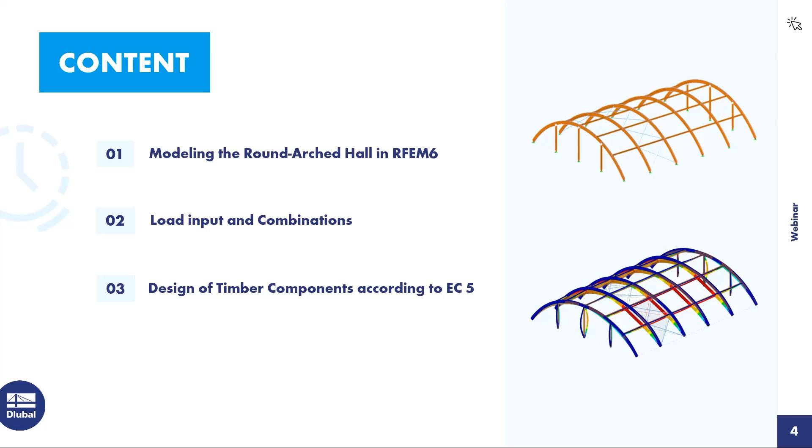To proceed with our project, I would like to go to our program RFEM 6. Here I need to create a new model, which I will name Round-Arched Hall. The add-ons that we will need today are the timber design and also the structure stability. We also need to pick our standards. We will need the European standards for timber, also with the German National Annex. We can continue by clicking OK.

There is a possibility that from the latest projects that you've done in RFEM 6, you would have here the materials or also the sections that you used before. To delete them, you can just go to the basic objects and say delete all basic objects. In this way, everything is deleted and we can continue with the model of our hall.

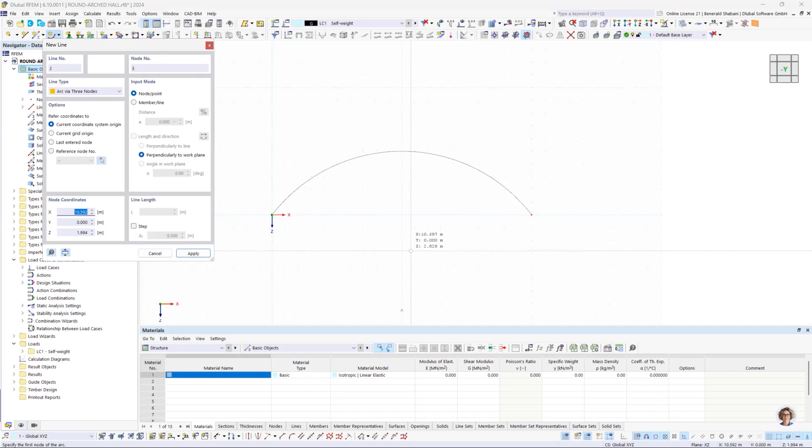First, I will need to draw an arc. To do that, I will pick an arc via 3 nodes. Our hall needs to have a height of 5 meters and also a 20 meter span. We have modeled our arc. Now we need to have a member from it.

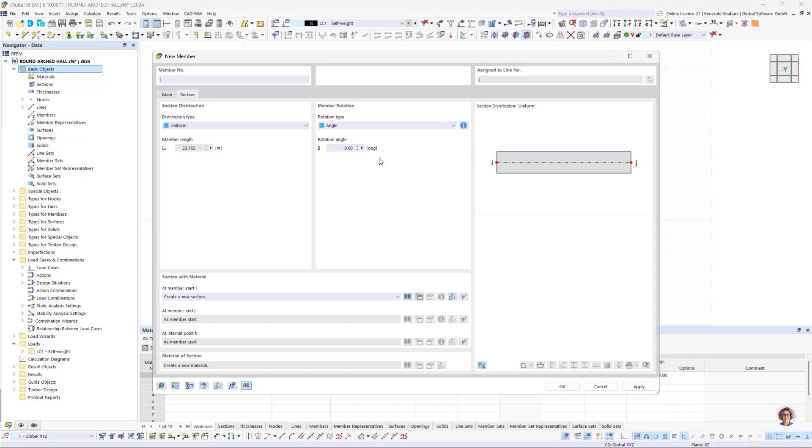Of course, we need to select a new section and also a new material. We will search in our library for the region European Union and a material type of timber. For our round arch hall, we would need a glued laminated timber, GL28c. As a section type, we will choose Massive 1 so we are able to just write our geometry. In this case, we need the geometry of 200 millimeters times 480 millimeters. Say apply and OK.

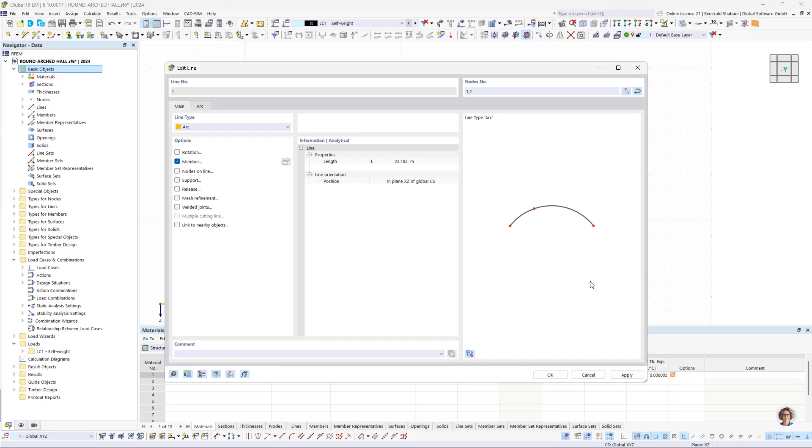And we can see that we have our truss. Of course, our truss also needs the hinged nodal supports. We just need to select the nodes and we will have our nodal supports modeled. We can also see that they are a bit too small, so for the model to look better and for us to see it in a better way, we can just make them a bit bigger. That would look a bit better, and we would have a better view in the program.

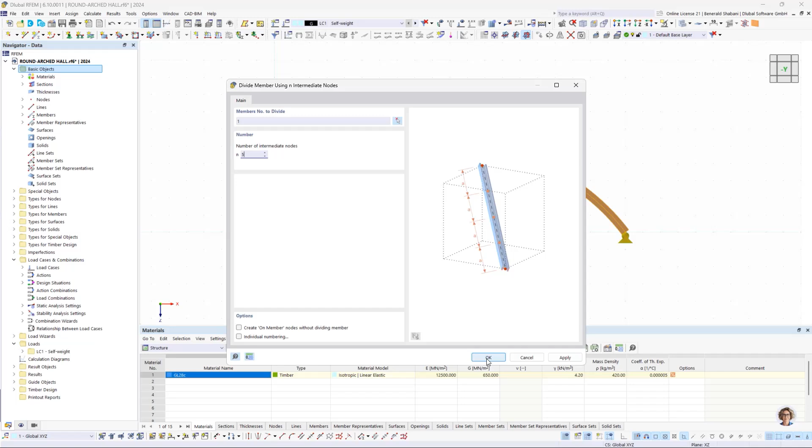Next, we want to divide our truss with intermediate nodes. We will divide it in 5 intermediate nodes. We need the nodes for the coupling. They are very important because the coupling rods should be located at these points where the nodes are, and then we can copy the truss. When we copy the truss, we will also create the coupling rods. But we'll proceed here first with OK. We'll see that our member is divided by 5 intermediate nodes.

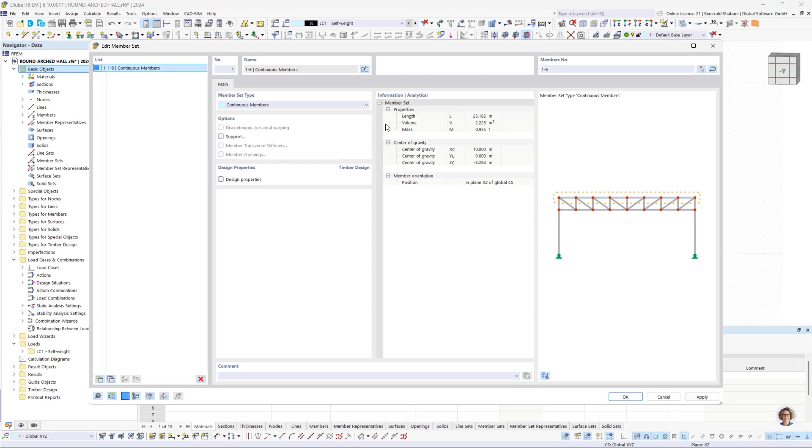Before we copy it, we first need to create a member set. Here we don't need to do anything, we just press OK, and we can see that we already created a new member set. Now we are ready to copy our member. To do that, we need to check create copy. And for our round arch hall, we will need 5 copies. But as we said, where the nodes are, we will also need to have the couplings.

Instead of modeling each one of them, we can just proceed here at the menu numbering and options and check here step links. And then we say here link nodes with line and also nodes with the member. Of course, here we need to also find another type of section.

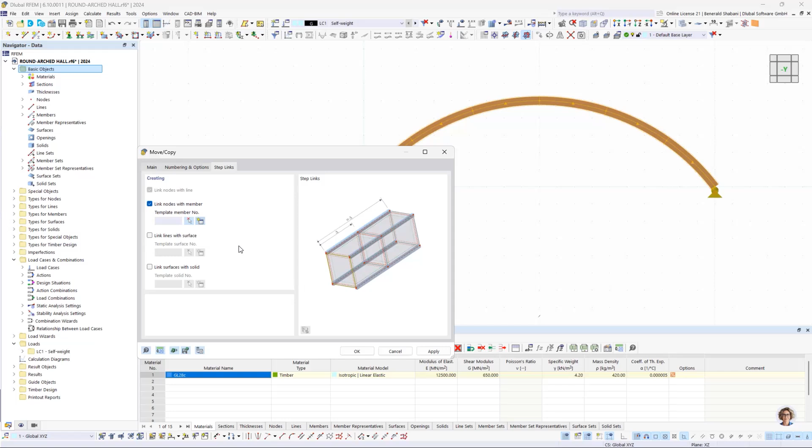We go to the sections, but firstly we need to choose our member type as truss. We can add a new section here and say for the truss I need a geometry of 120 millimeters times 120 millimeters. We'll press OK. The material is also the same, so we don't need to change it. We just can proceed with OK.

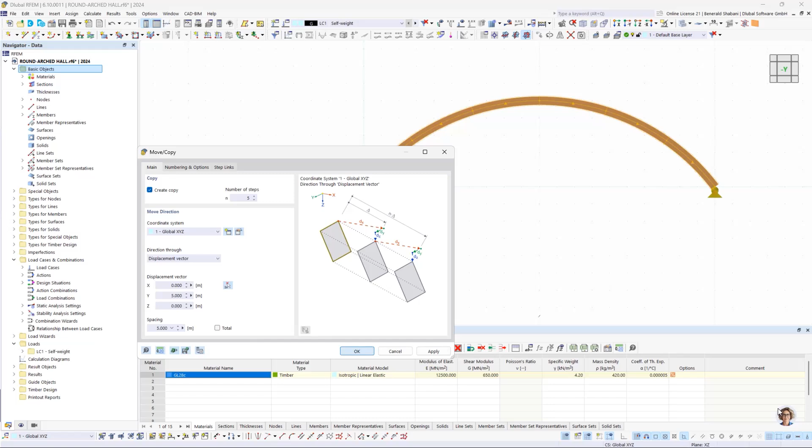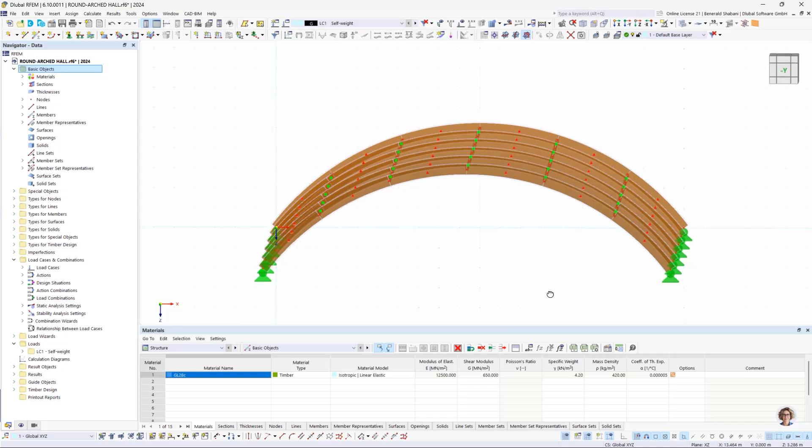And we say that I want to have my copies in Y direction every 5 meters. We'll press OK, and then we will see that our round arched hall would be modeled. Of course, the trusses here at the bottom, we don't need them, but I think it's faster this way for us just to delete them, so we can just delete them. Of course, we could have also before deselected the nodes here, but yeah, that would be just unneeded work.

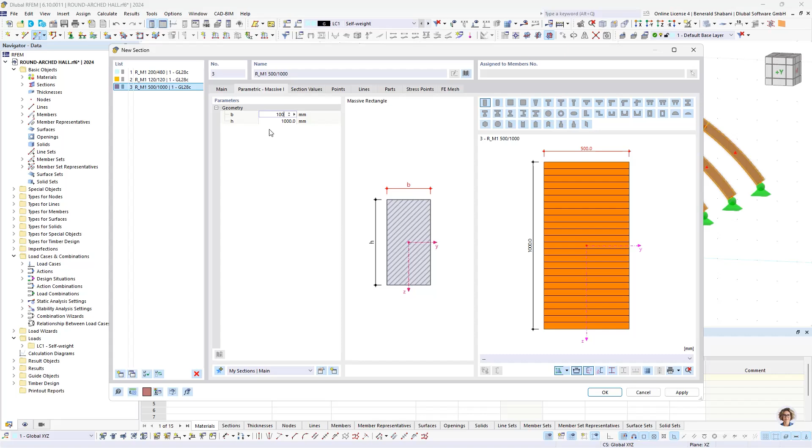We can see that our hall is partially modeled. The next thing to do is to model here the beams that will serve as gable support. To do that, I will need to find another section, but this time not anymore as a truss, but as a normal beam. Of course, for our gable supports, we will need to choose a new section, which will have the geometry of 100 millimeters times 200 millimeters. We can press here OK to proceed. The material of the gable supports can still be the same, so we don't need to change anything here.

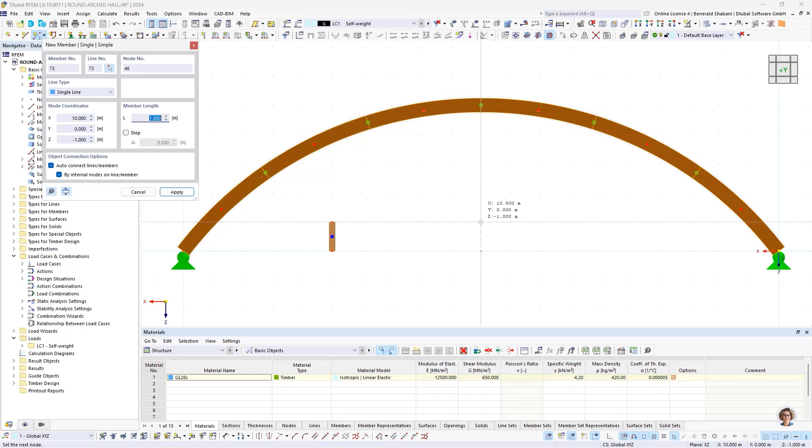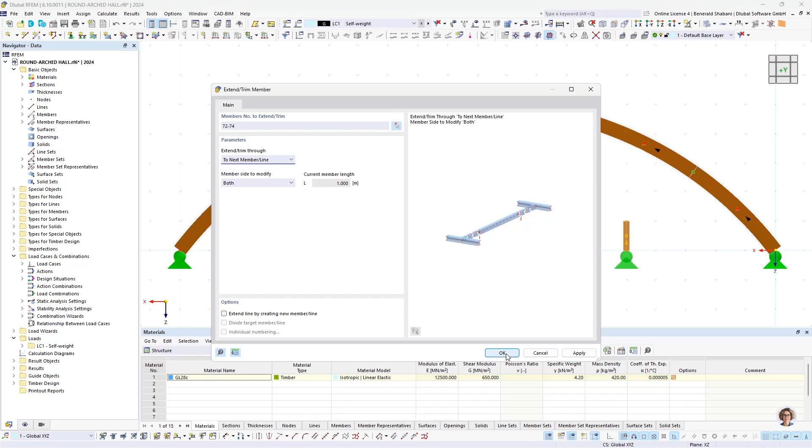I will first start to model them as shorter beams, and then later I will extend them until the next member. Of course, they also need their personal hinged nodal support. We can select the nodes and proceed with OK. To extend the gable supports until the next member, we need to select all three of them. We can find here extend or trim member until through the next member or line. We can just proceed here with OK, and we can see that our gable supports are extended to the next member.

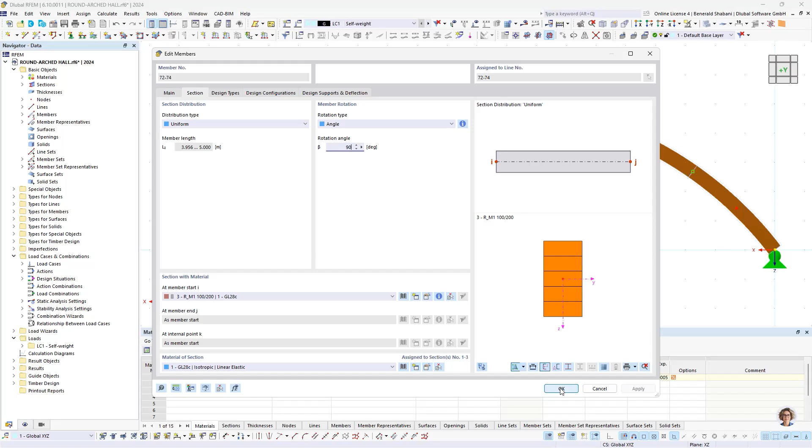We also need to turn the gable supports. We need to rotate them in a 90 degrees angle. That way the major axis will be in the longitudinal direction. To do that, we need to edit all three of them. We will go to the sections menu, and here we can see a part that says member rotation. Here we can just type rotation angle of 90 degrees and then press OK. We can see that our gable supports are rotated in a 90 degrees angle.

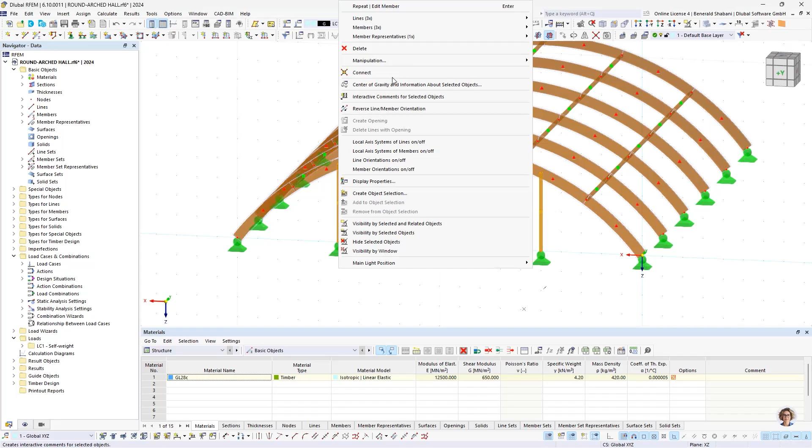Of course, we need the gable supports also for the other part, so we just can copy them. We will select everything that we need to copy and go to the menu, Move or Copy. We'll select here the menu of Create Copy, and we will need just one copy. Here, you need to also be careful because for the trusses, we also needed the couplings, and probably there is a possibility that this option is still on, so we just need to turn it off. In our case, it isn't like that.

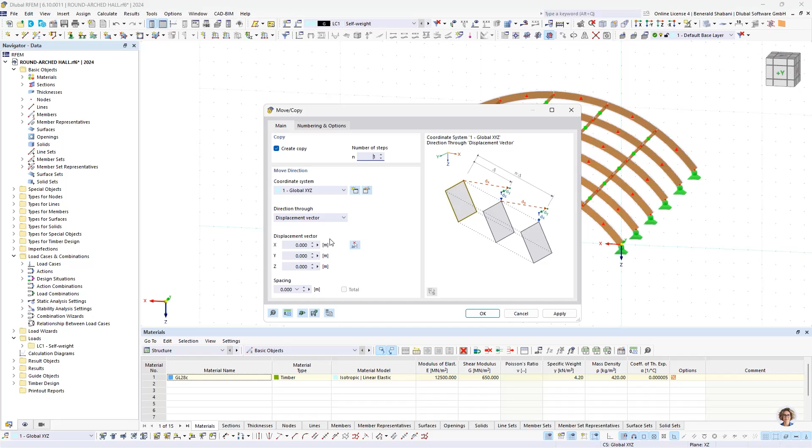We can choose our displacement vector just by choosing 2 points on our model. The first point that I will choose would be the point here, the original, and the next point where I want the things to be copied. We'll say here OK, and then we can see that the gable supports are also modeled for the other side.

The next thing I want to do is I want the connecting rods to align along the top edge of the truss so that each rod has a different angle. To do that, I need to align them toward the center of this arc, of this truss. How does this work? We can find it now. In our example, we can see the middle point of this arc.

But if in your model you cannot see it, you can just go to the display navigator and search here for lines. And here you would see a menu that says center point. You can just turn this on, and then you will see these small signs. Here, I just need to put a node as a helping node.

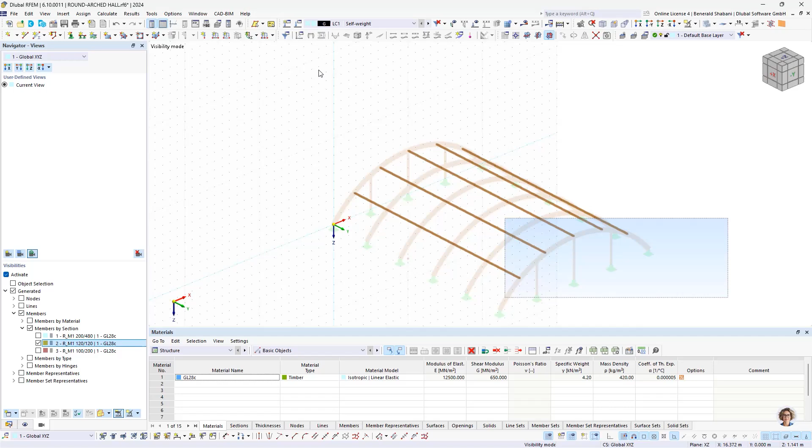And then I also need to select all the rods. You can do it in a lot of ways, just by selecting here or going to the views by visibilities. We can activate them, and then we can search for members by section. We know that our rods have a section of 120 millimeters times 120 millimeters. So we can just see them. We can select everything and then deactivate the visibilities.

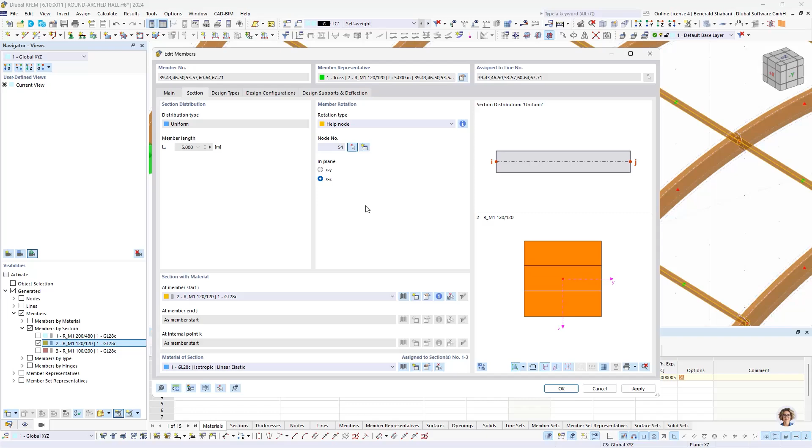Now we can edit all of them. And at the menu member rotation, as a rotation type, I don't need an angle anymore, but I need a help node. I think we know which node we are going to select. And in the plane X until Z. We'll say here OK. And then we will see that our rods now have a different angle from one another. They are the same way as I wanted them to have.

Now, the thing that I need to do is the bracing. For that, I will create another section. As a member type, I will use tensions. Here, I also need to find another section and also another material. Firstly, I will choose the next material. I will need a material for steel. Here we go firstly to the library, and as material type, I will search for steel. I can also type here S235.

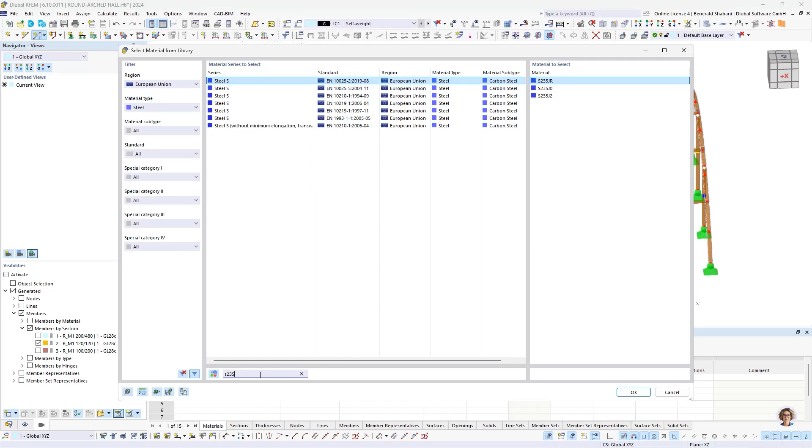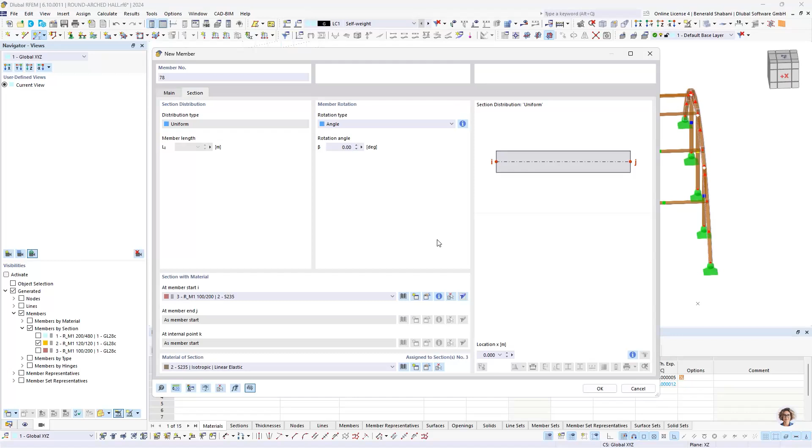I can press here OK, and now I need to look for a new section. For our bracing, I would need a round. As a section type, I would need a massive one, so I can give the diameter by myself, and I will also need a round section. We'll need a diameter of 16 millimeters. We can proceed here with OK. And then we can start to model it.

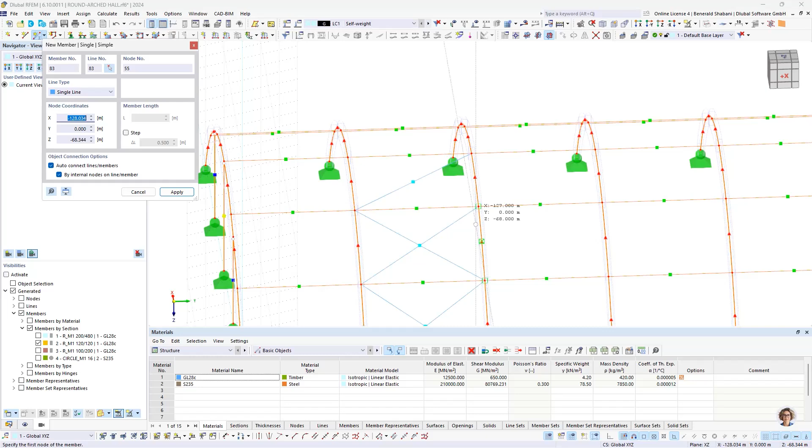For it to be easier for us, I can put our model into a wireframe model, so I can see every node and every line that I need to select. Modeling the bracing can be done like this, or you can draw just one of them and then mirror the other side, or with a rotation. There are a lot of ways to draw them. In our example, I will draw them until here, and then I want to mirror them for the other side.

To select all of them, I just click at the blue member representatives, and then I will go to the menu mirror. I will also need a copy from it and select the plane Y, Z. I will also need to pick a point here, which would be the node here, and just press OK. We can see that our round arch hall is fully modeled.

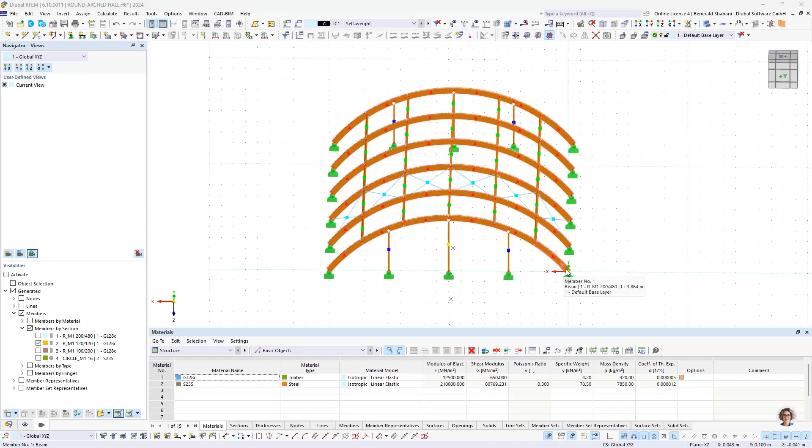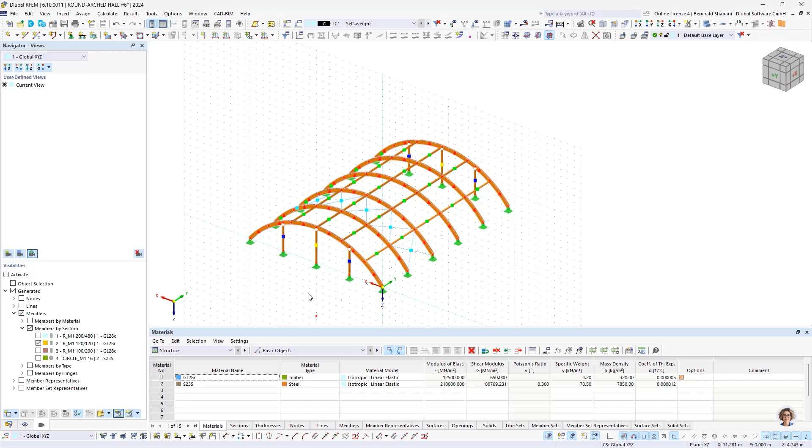Now we come to the second part of our webinar, which is also the last input. To proceed with that, I will firstly need to model at the gable supports two load transfer areas, which will help with the load transfer. They are probably the biggest advantage that we have today in RFEM 6 and that we also use in our model. Because of the roof construction, there are triangular and trapezoidal loads that apply to the gable supports. Without the load transfer area, we would have to apply the triangular and other types of loads individually. That would be a waste of time, and it would also be a lot harder than just using the load transfer.

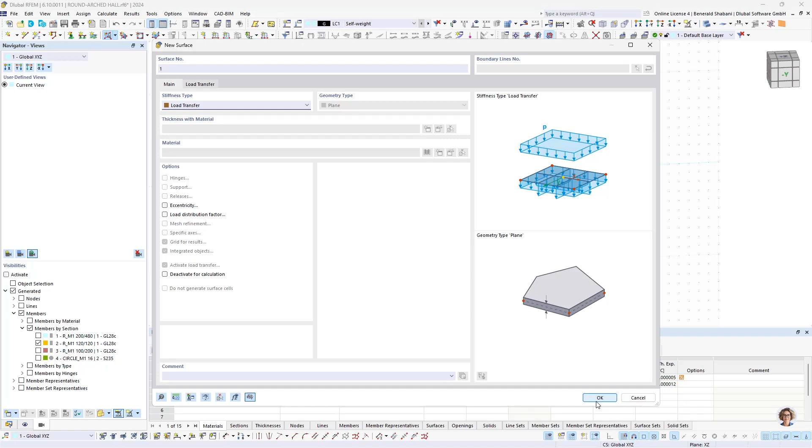First of all, I will need to draw here a line which would serve as the borders of the load transfer area. Second, I can just go to the menu here and select boundary. As a stiffness type, I will need a load transfer, and as you can see, I cannot specify a thickness or a material because it's a surface that is not there in reality. It's just there in our program to help us with the load transfer. We will continue with OK, and then we will select our boundaries.

We can see that we modeled our first load transfer area, and now we proceed with the second one. Now we also have the second one. Our hall spans in the x-axis. That's why we also need to go to the load transfer and select the category load transfer direction just in X stripes. That means that the surface is cut along the local axis into many surface stripes. The local axis you can see if you just put the mouse near the load transfer. The same thing we also need to do for the next load transfer area, and then we can proceed with OK.

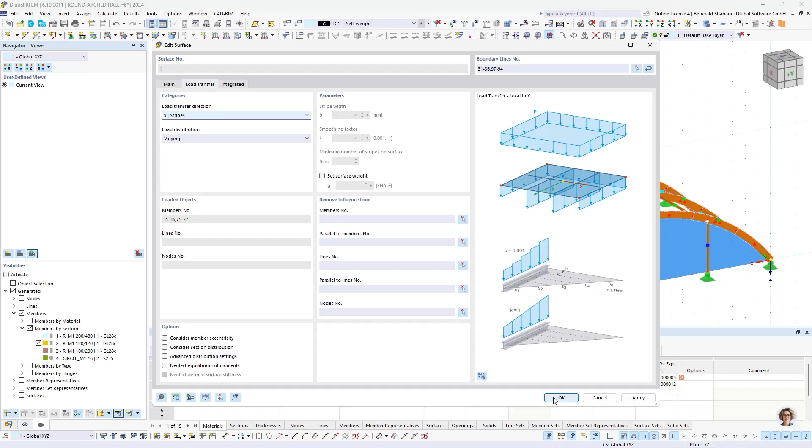As the first load, I will need here dead load and also the roof structure.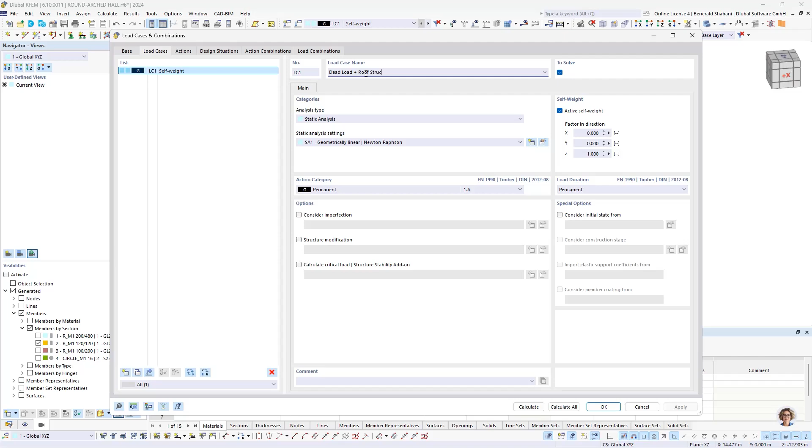I figured that here from truss to truss there would be trapezoidal profiles like sandwiches with insulation on top and a foil roof. I assumed it will weigh like 30 kilograms. Of course, the dead load can vary from hall to hall.

I would need a new member set load and type here 1.5 kilonewtons per meter. As a load direction, it's global in Z on true length. And now I just need to select my member sets. We will press OK, and then we can see our load being generated.

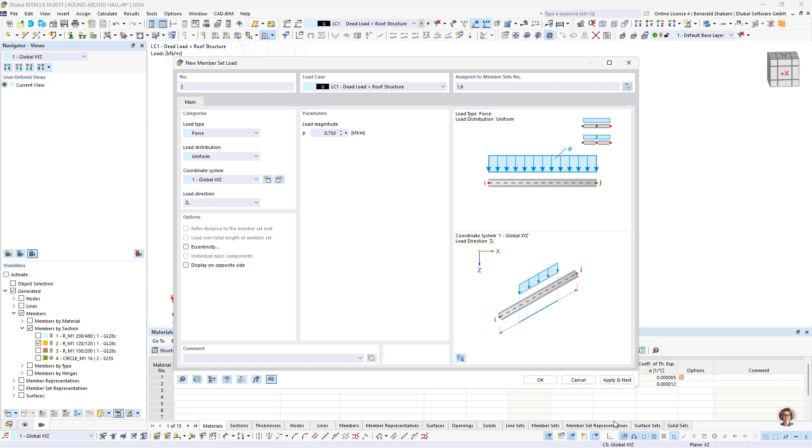Of course, at the gable supports, it will be the half of the load. So we go and select a new member set load and put just the half of it. We will proceed with OK. Then we will be done with the dead load and the roof structure load.

To proceed with the snow load, I would like to go to my presentation. The snow load will proceed according to DIN EN 1991-1-3, section 5.3.5 for the barrel roofs. These standards specify two variants that must be considered: the unblown snow and the drifted snow load. We must represent these two variants using two load cases. Firstly, the snow load as a distributed load, and also the drifted snow load as a double triangular load.

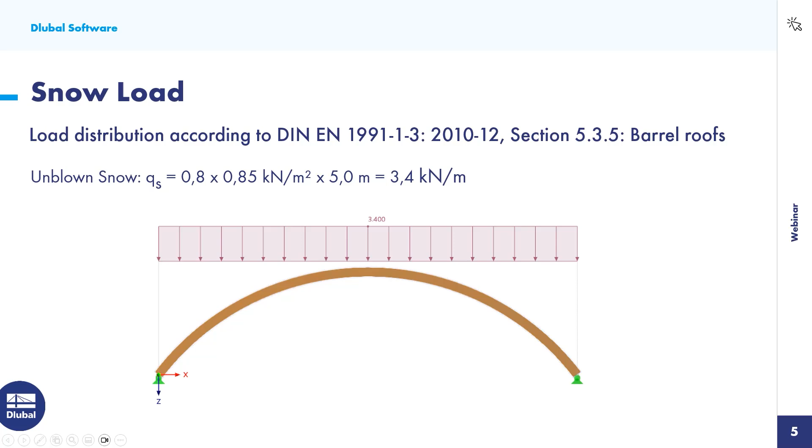I think that the values, you can understand what they mean. I cannot show the standards here because of copyright, but we have here the form coefficient, the characteristic snow load, and also the influence width, that for the unblown snow equals 3.4 kilonewtons per meter as a member set load. For the drifted snow, of course, we have different form coefficients. Here we have a 2.0, which will equal 8.5 kilonewtons per meter, and also as a second part, the half of it.

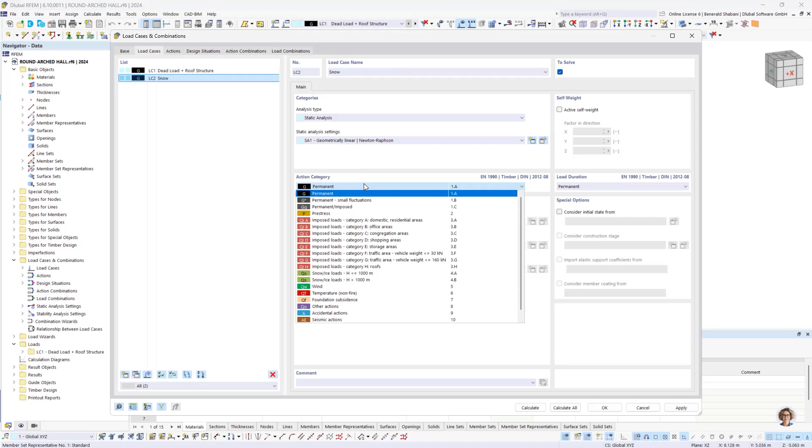To proceed with the snow load, I will also go again to the program and select here new load case. As an action category, I will need to choose here snow and confirm with OK. Of course, I will need a new member set load, and then type here 3.4 kilonewtons per meter.

Now, as a load direction, according to standards, I need to choose a load direction global in Z on projected length. And now we just need to select our members. We can proceed here with OK, apply and next, and then we can see that our load for the main trusses is modeled.

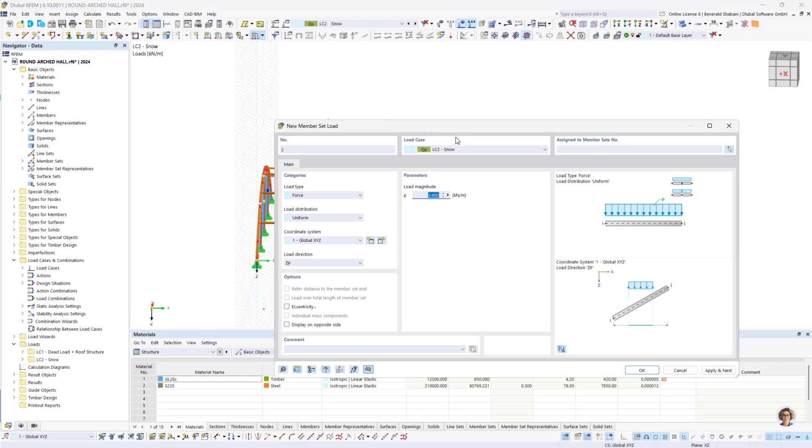And then say here that at the gable supports, I have just the half of it. We also select the gable supports and then proceed with OK. This way we are done with the unblown snow load. Now we can proceed with a new snow case, which is the drifted load.

Of course, I need to put here a new load case, which I will name drifted snow load. As an action category, it can stay this way. I don't need to change it. I just need to proceed with OK. And then select here once again, new member set load.

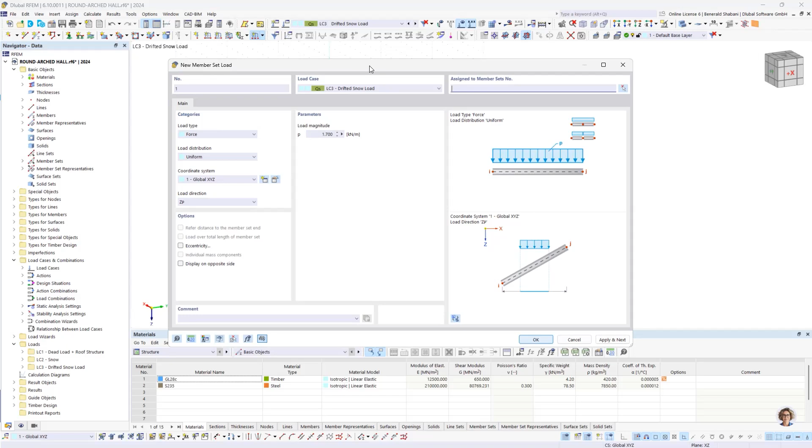We said that here we have a double triangular load. So to be able to put this type of load into our program, we need to choose as a load distribution varying, and then we can just type our parameters by ourselves. Then we start here at 0 meters, where we also have a force of 0 kilonewtons. 5 meters, which will be the first value of our load. Here we have the half of it.

Also, just from the parameters, we can imagine a bit how our load will look. That would look just like a triangle here, where it goes up at 8.5 and then goes down to 0, then up again, and then at 20 meters, which is our span length, would go again to 0. Now we just need to choose once again the members that we need the loads on. We can proceed here with apply and next and see our load generated.

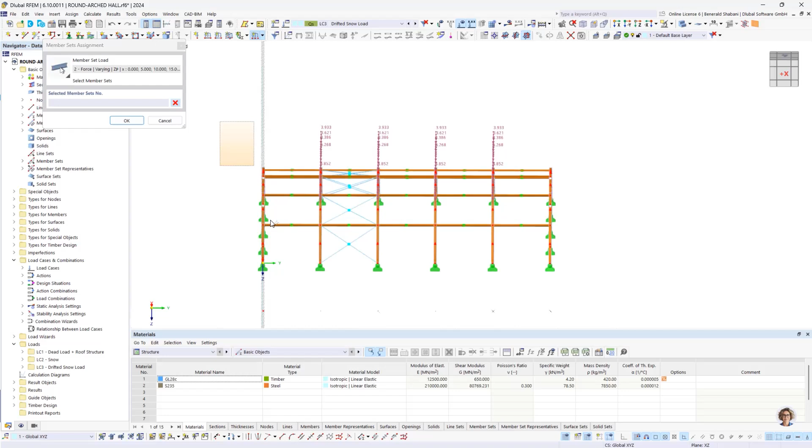Of course, at the gable trusses, we need the half of it. We can proceed here with OK, and we are done with the drifted snow load. Next would be the wind load. For that, I need to go again to my PowerPoint.

For the wind load on the truss, crosswise, we will have a load distribution according to DIN EN 1991-1-4, section 7.2.8 for curved roofs and domes, which tells us to split our truss into 3 different areas, area A, area B, and area C. For each area, we will have different CP values, starting with 0.4 for the first area, 0.95 for the second area, and also 0.4 for the last area.

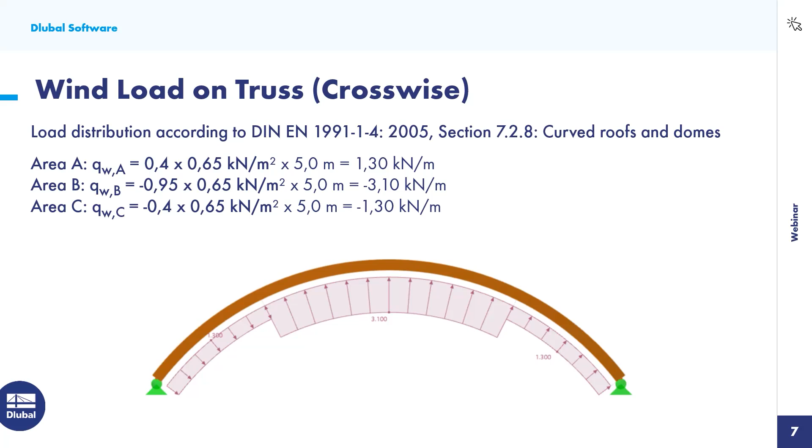Also, we will need to look at the benefit that we have in RFEM 6, that it was the area that we had on our gable supports, where we will calculate our load distribution according to DIN 1991-1-4, section 7.2.2 for vertical walls of buildings with rectangular floor plan, which will give us a load magnitude of 0.52 kilonewtons per square meter.

To continue with the input of this load, I need to go in our program again, and I will select a new load case, which I will name wind in plus X direction. As an action category, I don't need snow category anymore, but I will choose wind here, and I will press OK.

Just like we did for the drifted snow load, I will need to use a new member set load. As a load distribution, I don't need uniform anymore, but I need varying.

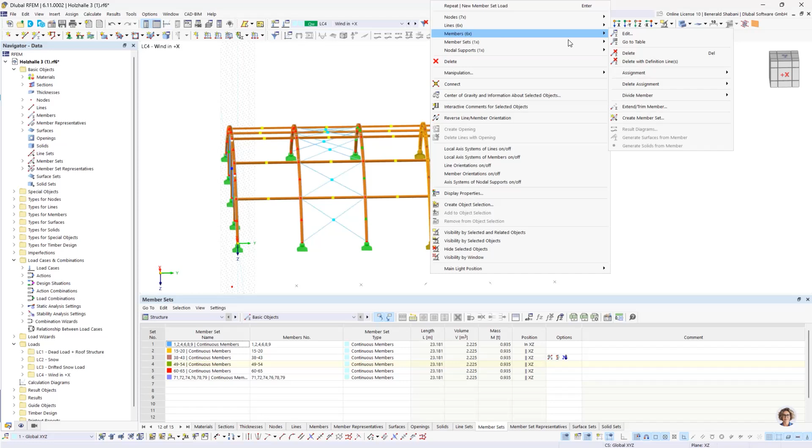Of course, the first thing to do is to know how long one of our trusses is. To do that in RFEM 6, we have a lot of ways. We can go to the table with the member sets and look at the length of each member set, which is 23.2. Or we can select one of the member sets and edit it, and there we will have the length, which will also be 23.2.

We can continue with the input of our load. As I said, we need a varying load. In local coordinate system, for the load to be perpendicular to our trusses, we will start at 0 with a value of 1.3 kilonewton, and at 5.8 also with a value of 1.3 kilonewton. Here we will have our wind draft, and here it will be the end of our truss.

The next thing to do is to select the member sets where we need to apply our load. We can say apply and next, and then we can see that our load has been generated.

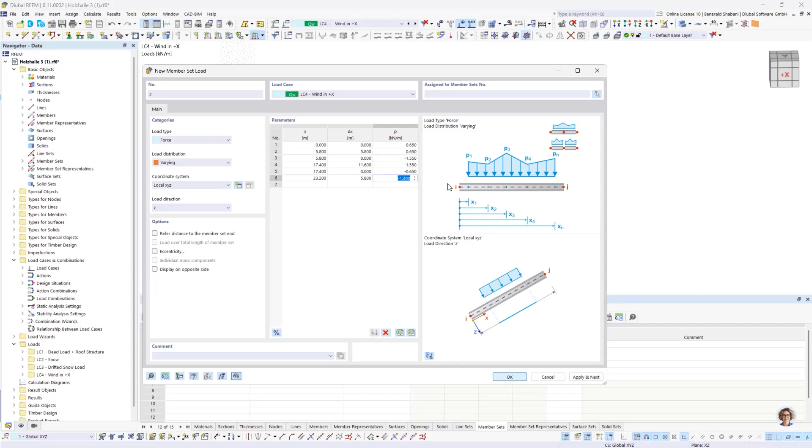The next thing to do is to apply the same load with half the values for the gable supports, and I can just change the values here by adding 0.65, also 0.65. As always, we need to select our member sets and then continue with OK. Here we have our load that has been generated.

Now we continue with the load on our surface, which is a load distribution area. As we saw in our PowerPoint, we will have a load magnitude of 0.52 kilonewtons per square meter, as a load direction global in Y on the true area.

We will select both of the areas and then continue with OK. We can imagine a bit how our wind is going to go in X direction, which tells us that the load on the surface here is in the wrong direction. To change that, I will just add a minus here, which I will confirm with OK. And this would be our load for the wind in the X direction.

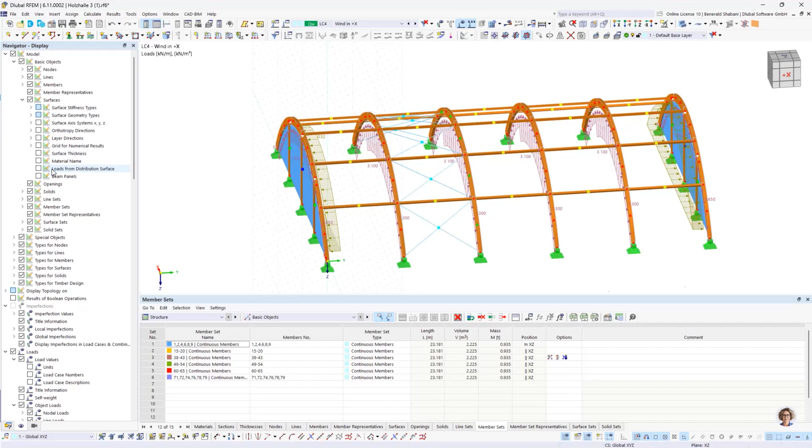To look at the benefit that we receive from the load distribution area, we will need to go to the display navigator and search for surfaces. We will have a small menu that says loads from distribution surface. If we check this, we will see the distributed loads, where we see triangular loads and also trapezoidal loads that come from the roof structure. Back in the days, we used to input all of these loads manually because there wasn't a faster way. But nowadays, there is a way faster and easier way that we have with the load distribution area, so we also use it.

The next thing to do is to apply the wind load in the Y direction, like in the other direction. To do that, I would first like to go again to our PowerPoint. For this type of load, there is nothing in the standards, or I didn't find anything, but in principle for gable and trough roofs, according to DIN 1991-1-4, section 7.2.5, there are CP values for wind in the longitudinal direction, also in Y direction. I calculated an average of 0.7 multiplied with the peak pressure and also with the influence width, and applied it over the entire length of our truss, which is a load equal to 2.3 kilonewtons per meter as a wind draft.

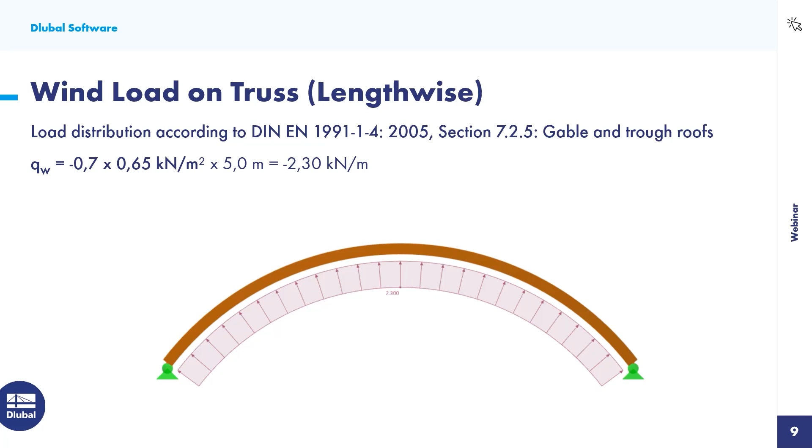Just like we saw for the other type of wind, we also need to look at the wind load on the area in Y direction, which would be according to DIN 1991-1-4, section 7.2.2 for vertical walls of buildings with rectangular floor plan. We'll have here the first area, which I named D because this is also how it's described in the standards, where we see a CP value of 0.7 and a load magnitude of 0.46 kilonewtons per square meter. And also the next, which is the second area, I named it E, where we will have 0.3 as a CP value, where here would be the wind draft on the area. To continue with this wind load, I will go again to our program.

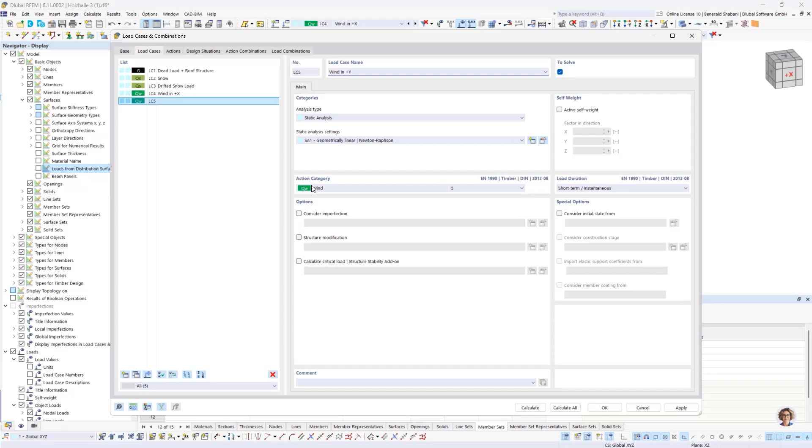And just like we did it for the last one, I need to add here a new load case, which I will name wind in plus Y. As an action category, I don't need to change it, it's fine, and I can just proceed with OK, and start inputting our load.

I need a new member set load, just like always, but this time I don't need a load distribution varying, but a uniform one. I will put our value that we saw in the PowerPoint, which was 2.3 kilonewtons as the wind draft, and I need to select all our trusses that we need this load applied to.

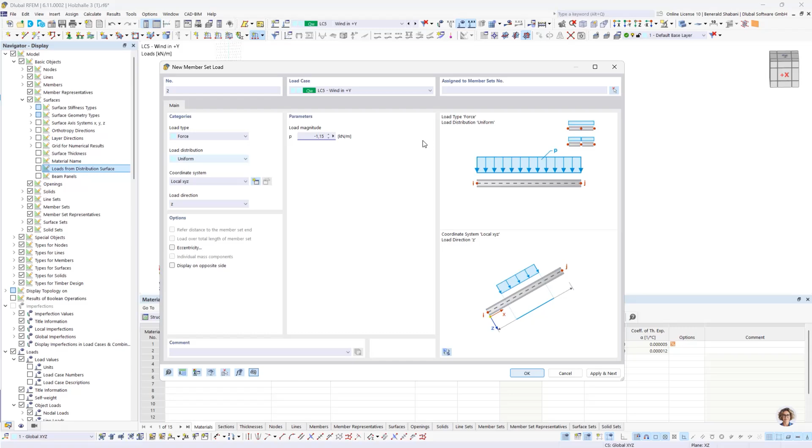We can select here apply and next. We can see that our load has been generated, and then we can change here the value for the half of it in the gable support part, which will be 1.15 kilonewtons per meter. Just like always, we select the place where we want our load to be and then proceed with OK. Also, don't forget, for this part we need a coordinate system as local for our load to be perpendicular, like with a 90 degree angle to our truss.

This was the load on our trusses. Now we need the load on the surface areas, where I need a new surface load.

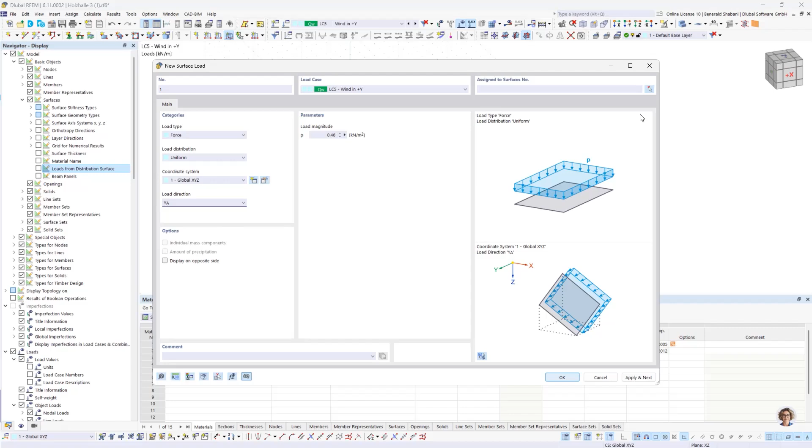Just like we saw in the PowerPoint, first for the first area, I need a load of 0.46 kilonewtons per square meter, with the load direction global in Y on true area. Then I select the first load, continue with OK, apply and next, check if the load is being generated, and then apply the next load, which is 0.20 kilonewtons per square meter. I'll proceed here with OK, and that's how I'll be done with the load in Y direction.

The next thing to do is to apply the imperfections, where I will go to the imperfection and select new imperfection case. I can just name it imperfections - of course, you can name it as you wish. I need to be sure that my imperfections are set active, and then continue with OK.

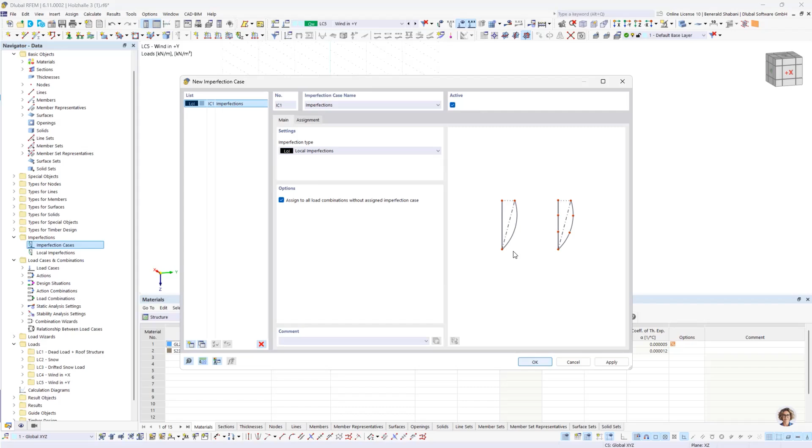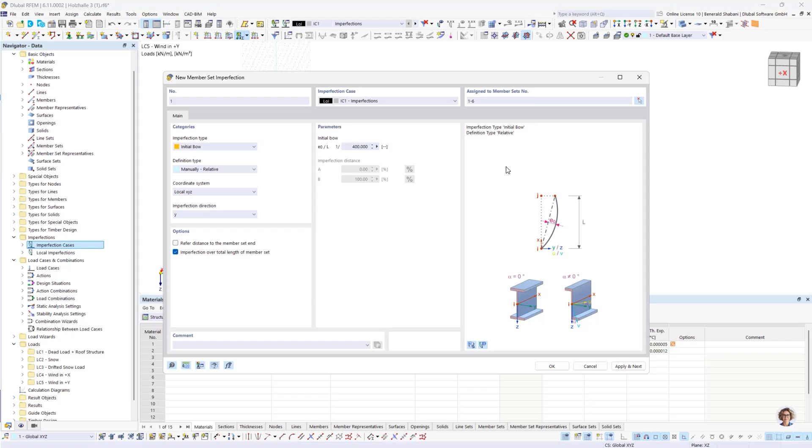I will need a new member set imperfection, as an initial bow, manually relative, with a value of 1/400th. As an imperfection direction, I will choose local in Y and then select all the members that we have. Of course, we could have done it also by setting it manually, just by typing 1 until 6, but this way it's easier to do.

We see that now our imperfections have been set. The last thing to do for the load input and combinations is to apply a bracing for the tension rods, which of course will be easier for me if I could just see the tension rods, to make it easier to apply the bracing.

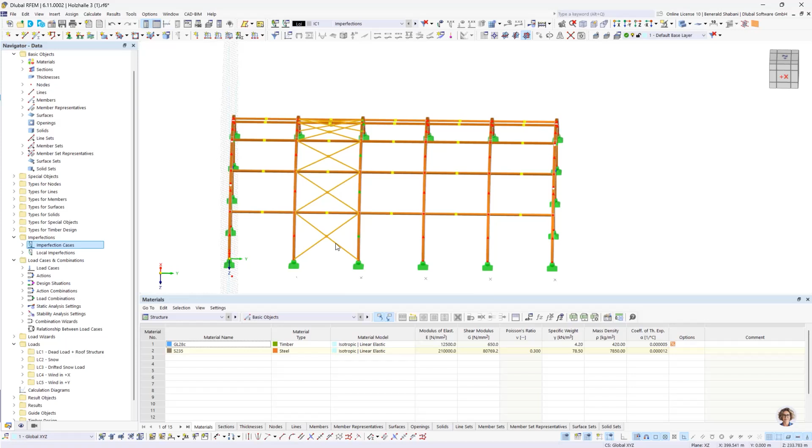To do that, we have a lot of ways in RFEM 6. One way could be to press on the member representative, where I can select every one of them, and then say visibility by selected objects for me to be able to see just them. Or I can go to the visibilities and activate them, and say by members, members by section, and choose here the round section.

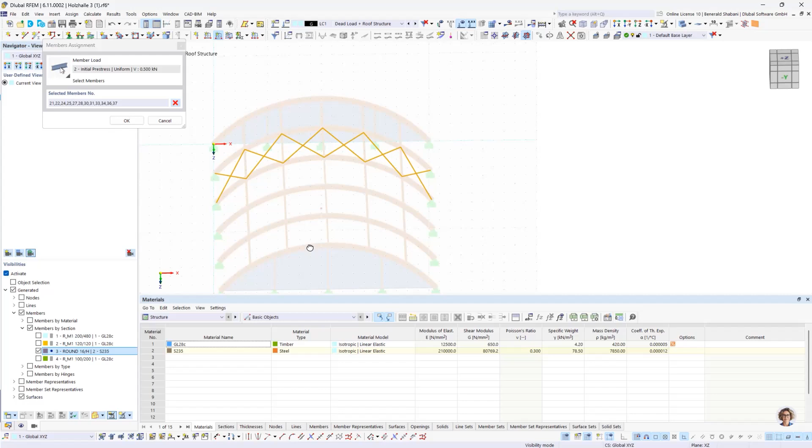Our bracing belongs to the dead load and roof structure, and here I need to set a new member load, where as a load type I will add an initial pre-stress, which will be 0.5 kilonewtons, and assign it to all the members that I want it assigned to. Check if everyone is selected - it looks good, and then I can proceed with OK.

Now we are done with our load input and the combinations, so we can start with the design of the timber components.

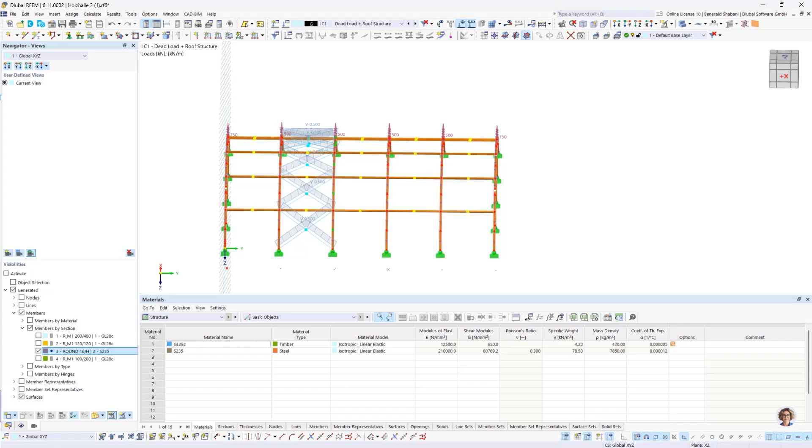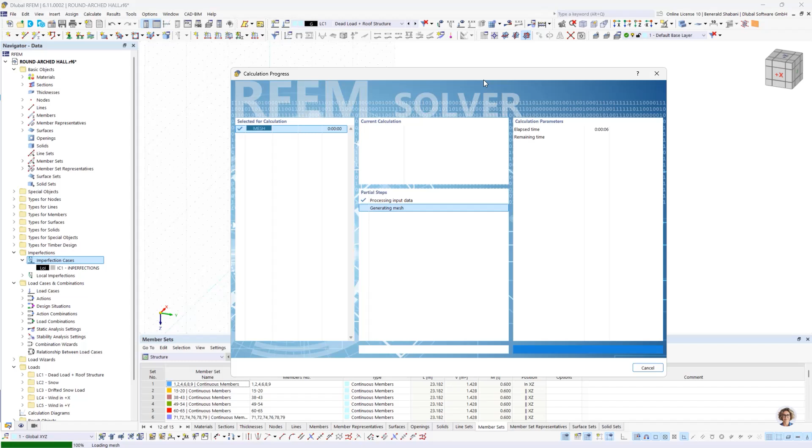To continue, I would just need to go again to our program and to see if we did a mistake or something, I will calculate everything, so we can also see the deformation for every load case. And also, if we made a mistake, our program will notice it and say that something is wrong. Of course, because we are calculating everything, this will take a bit more time than just calculating a singular snow load.

We have here all the deformations where we can look, and also local deformations or strains, internal forces.

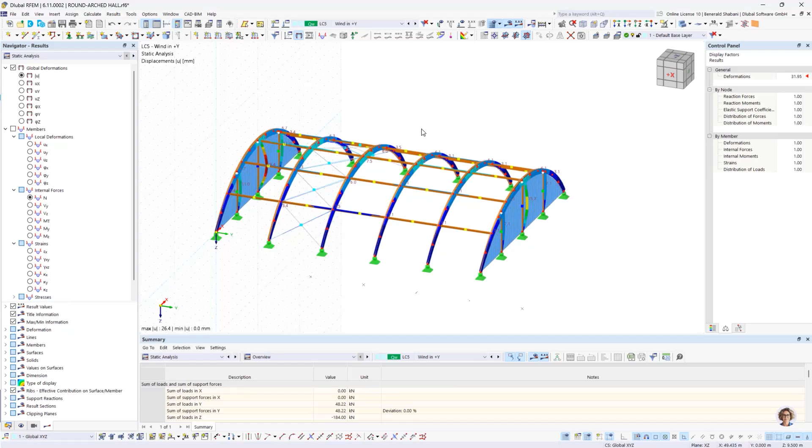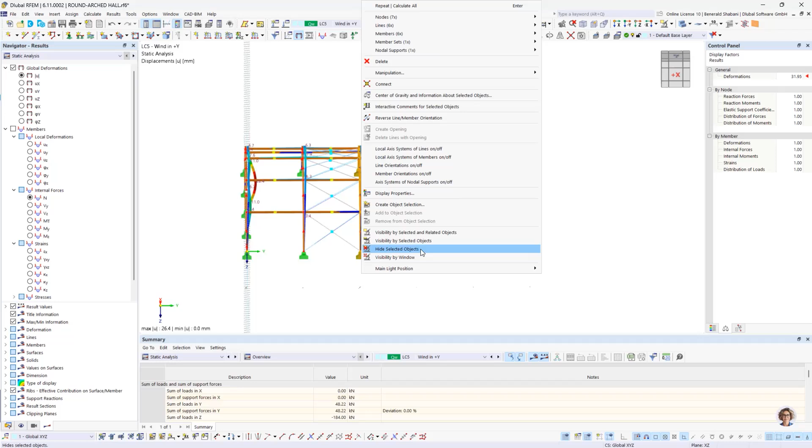We see here that we have too much information, so we need to shorten up some things. For the design of the timber components, I don't need to look at the entire hall, but I will just look at one of our trusses. Then from this truss, I will look at the stability control. To start, I will just select this truss here, and I want to see just this truss for it to be more easier.

First of all, we need to check if the member orientation is correct. To do that, I will need to go to the display navigator and search for members, and select member orientation. We can see that our member orientation is the same way as I wanted it to be, so it's correct.

I will take a look at our load cases, where we have a lot of load cases that we also will not need.

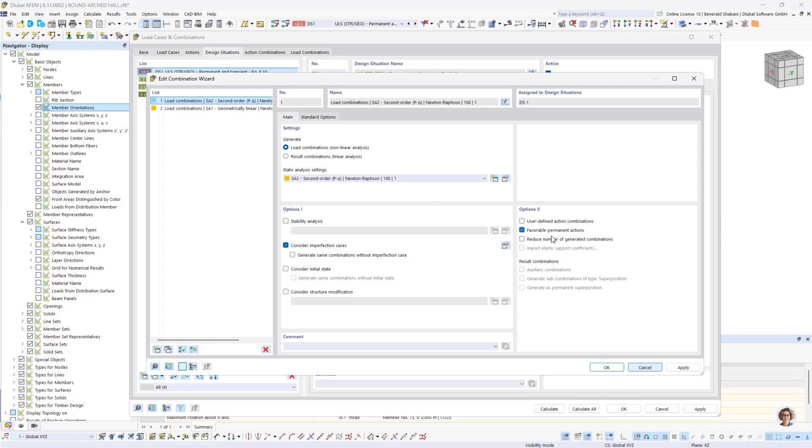Firstly, I will go to our design situation, and at our combination wizard, I will need to edit it. Here we have a part that says Options 2, and I will need to check favorable permanent actions, which would be there for the lifting loads, and press OK.

Looking at the load combinations, for this part there are just these 2 loads that I will be looking at. The rest we can either leave this way, or we can select all of them and say that I don't want to calculate them, and continue with OK.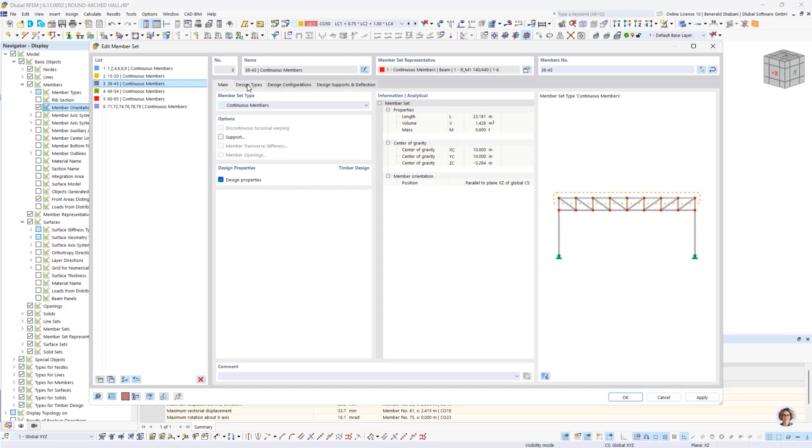To start with the design of the timber component, we will need to edit our member set, and we will see here design properties. We will need to check and go to the design types.

Here we have the effective length, where we will need to add a new effective length. Here is the menu where it gets interesting. We say to the program, I will make a stiffening disc on top of it, and then I just need to prove the buckling around the major axis. So the flexural buckling around the minor axis and the lateral torsional buckling, we don't need to look at for now.

If we go to the menu nodal supports and effective length, we will see that here we have an effective length factor, which according to the standards, we need to calculate. Of course, I calculated it before we did the webinar, and for our round arch hall, we will have an effective length factor of 1.25.

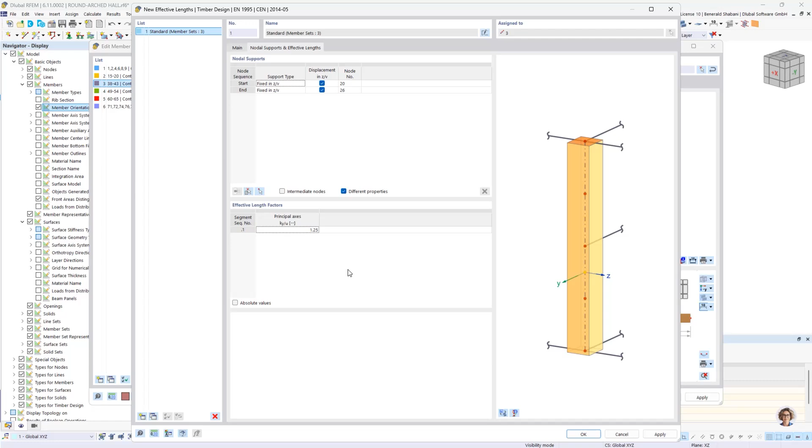We can select here with OK, and then go to the summary. We'll go to the timber design.

For the stability control, we always just need to consider the ultimate limit state. The rest I don't need to look at, because this would be deflection, and we don't need the serviceability limit state. Of course, I also don't need to calculate every single truss, but just this truss that I have here, so I will go to the menu Objects to Design and deactivate everything.

Here I will search for the member set, where I will go at the selected objects and just select our member set.

Now I will proceed with calculating our member sets, where we can see that every proof is successfully achieved.

Therefore, we will receive a warning that says the equivalent bar method cannot be used as standard, and that is why I can say I can stiffen it, and then all I have to do is check the flexural buckling around the major axis. For that, there is a proof according to German standards, which is proof 6.3.2, which can also be used for the equivalent bar method, which would be the proof here.

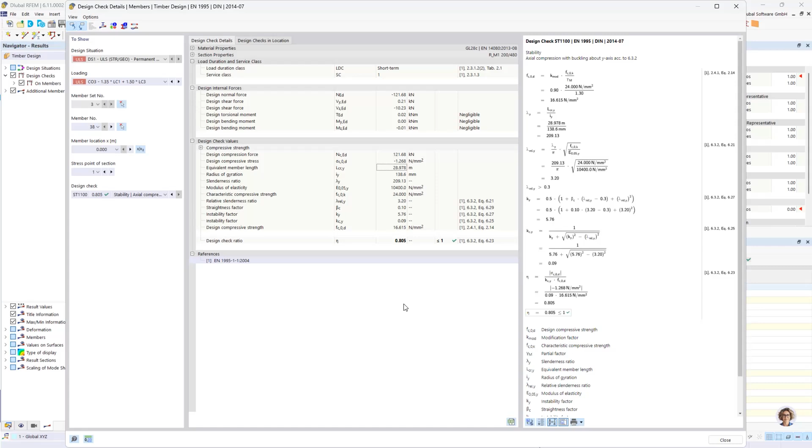If we look more into it, we can see at the design check values, we have the equivalent member length, where we will have a length of 28.9 meters, which, if we remember, we had a true length of 23.2 meters. That means our member has now extended from 23.2 to 28.9 meters, which is a factor of 1.25.

If we try to use the value of 1, the value will still meet the requirements. However, it's not correct according to the standards. To see that, we can also go again to the member set dialog and go to design types, and here we will continue with an effective length factor of 1.

As I said, the proofs will always be successfully achieved, but that is not correct according to the standards. Therefore, I'm using the equivalent bar method. That means I have to assume that it's braced and enter 1.25 as an effective length factor. Normally, we don't have formwork, but rather compression supports or purlins that act here on this side. And we want to look at these for stability.

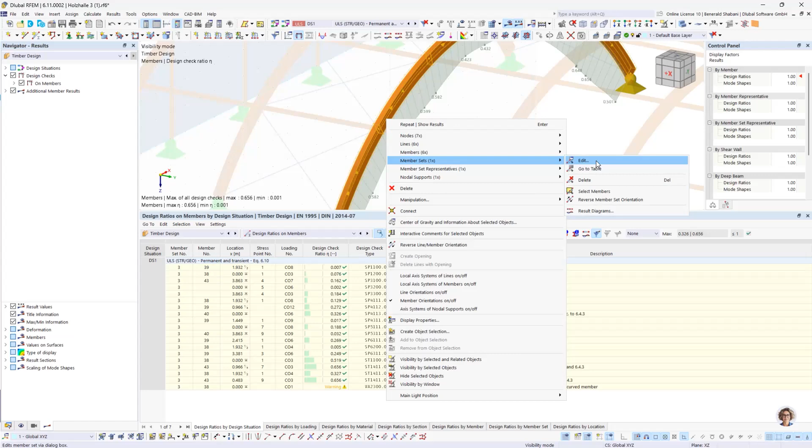Therefore, with our RFEM 6, we have the option of using the eigenvalue method and thus examining the proof, which is also the proof for lateral torsional buckling. To continue with that, we go to the same dialog again and edit our member set, design types, and then here we say we don't need the flexural buckling around the major axis, but the lateral torsional buckling with the eigenvalue method. If we don't enter anything here, it will be calculated as an unstiffened beam. We can try it out, say OK, and then calculate.

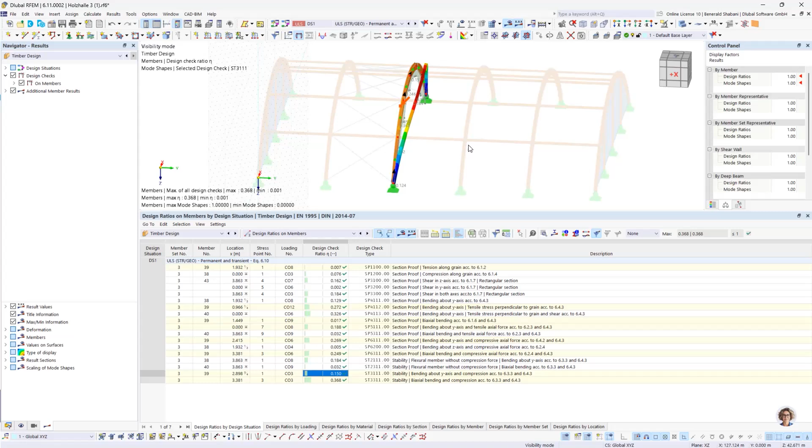We can see here that every proof is successfully achieved, including proof 6.3.3, which is the proof for lateral torsional buckling. Of course, in reality, we cannot build our hall this way, but we can show our bending picture. To bring our model closer to reality, we need to go again to our member set dialog.

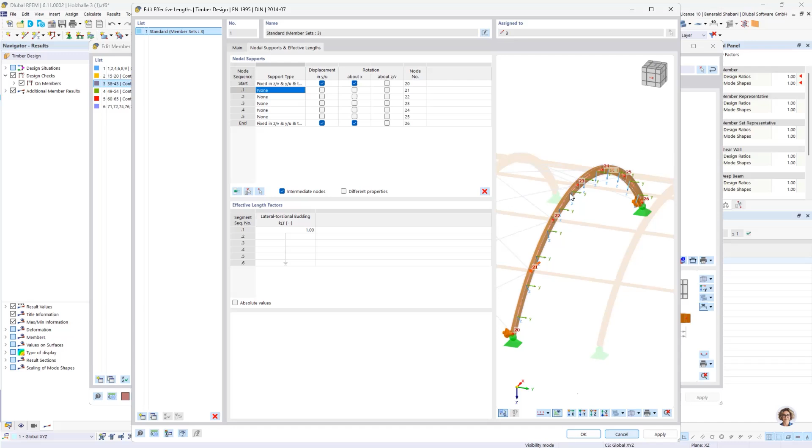Probably if I show it this way, it will be easier for you to understand what I want to explain. Here I will select the intermediate nodes, and we saw from the beginning that we have 5 intermediate nodes, so I will add 5 of them. The nodes will be there for us to make supports which will imitate the purlins, which will bring our model and our truss closer to reality. We will say here that they are held in Y direction. In this way, we can imagine that they imitate the purlins. We can press OK.

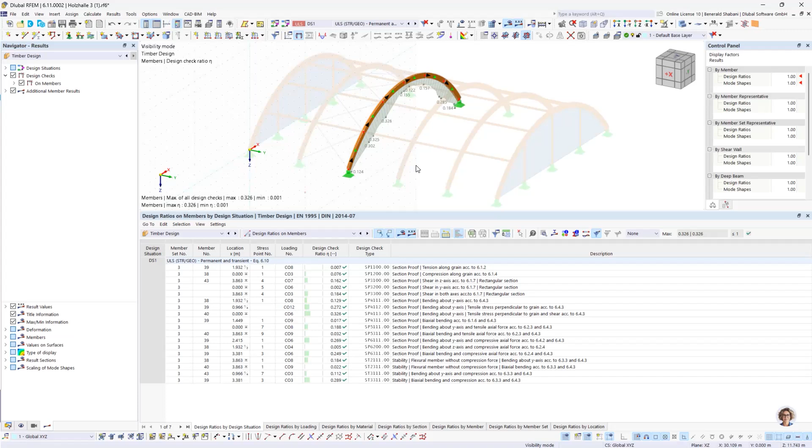And then calculate our member set again, where we will see that every proof is successfully achieved. Also with RFEM 6, we have the possibility to do something really fine to bring our model even closer to reality, which will be at the supports where they imitate our purlins. Of course, the purlins will not be set here, but on top of it. So we have the possibility with RFEM 6 to select an eccentricity type, which I can choose, for example, at upper flange.

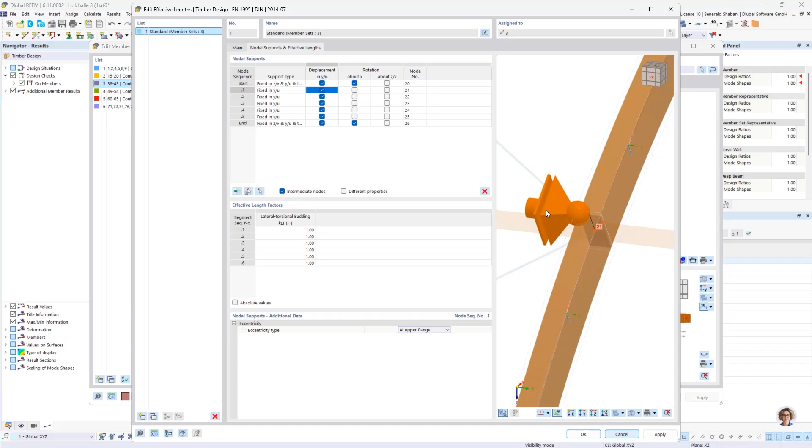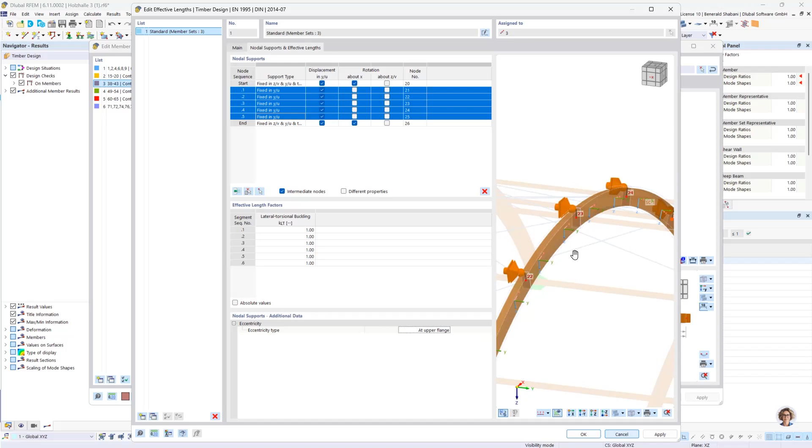If we look at this support, when I pick the eccentricity type as at upper flange, it will go up a bit, which will imitate the purlins even better. I can do the same thing for all the supports that imitate the purlins. To do that, I can just press the Ctrl key and edit all of them at the same time, and say here for all of them at upper flange, where we can see that every single support is a bit more up, and press OK.

We can also calculate it again and show our proofs, which are, of course, successfully achieved. In this way, we brought our model closer to reality. If we look at proof 6.3.3, we will see the proof where alpha crit is determined, which will be the calculation here.